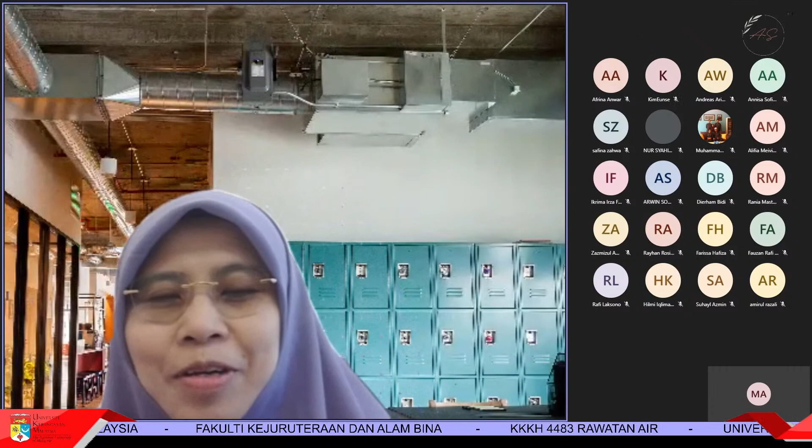Yes. Okay, because you thought that this week is a public holiday, eh? So actually, Malaysia has the highest number of public holidays in the world. That's why I'll give you our Malaysian calendar, because some public holidays are just for a few states, and sometimes it's for the whole country. Okay, I think we can start now.

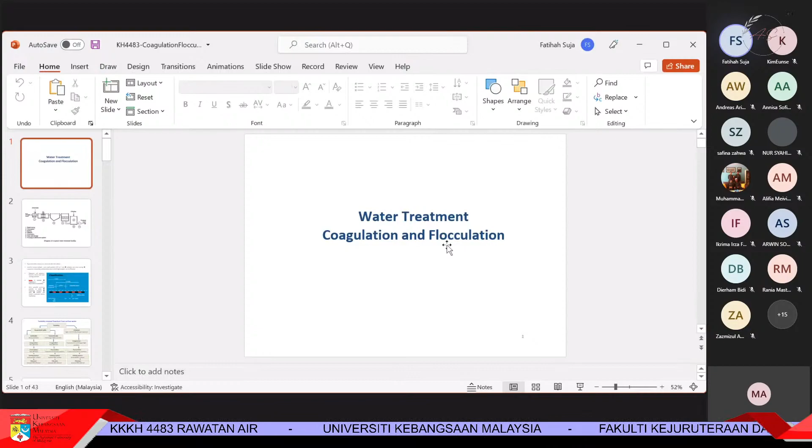Okay, so this week is about water treatment, coagulation and flocculation. As I mentioned before, I don't actually follow the treatment train, because some of the units you may get earlier or some later. So I don't want to fix it for you. So I started the lecture with the filtration unit, and this week is followed by coagulation and flocculation.

Okay, so this is the diagram of a typical treatment facility where you have your raw water coming in, and you can have your coagulation and also the flocculation unit. Sometimes they are combined, sometimes they are separate, sometimes the flocculation is together with the sedimentation process. So here 3 is settling, 4 is filtration, then chlorination, the disinfection, clear well storage, and pumping to the distribution system. This is just a typical treatment facility, but of course depending on your water quality characteristics, you can arrange the unit operations the water needs.

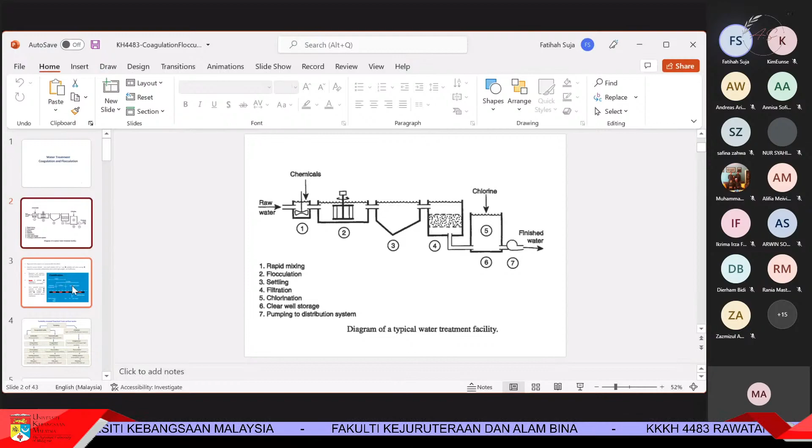Okay, so today is on coagulation and flocculation. Coagulation and flocculation are two consecutive processes, usually with coagulation first, followed by flocculation. These processes are used to remove colloidal particles from water. Colloids are very small particles, and these colloids can cause turbidity and color.

And they are very small, can be 0.1 micron. 1 micron is 1 times 10 to the minus 6 meter. So this is 1 micron until 10 to the minus 9 meter. This is the colloid range, the classification based on size. So these are the colloids that we want to treat. They are very small particles.

They cannot be removed by sedimentation because sedimentation is by gravity, but colloids are very lightweight. So they cannot be removed by sedimentation, and also they cannot be removed by filtration, because they are very small.

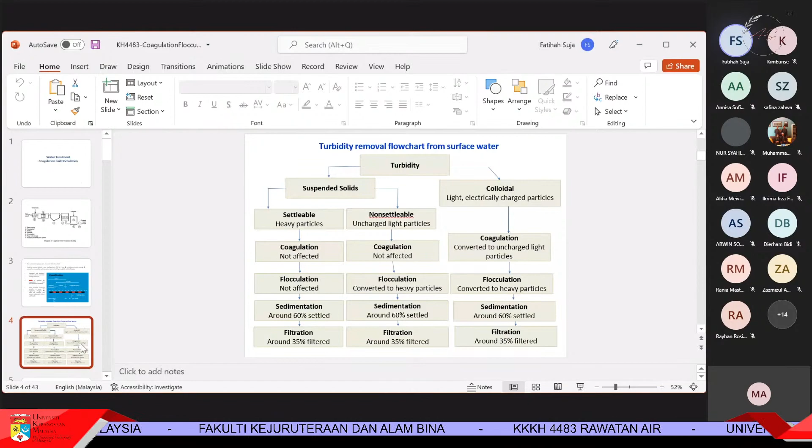So as I mentioned just now, the colloids are negatively charged. So this is the colloid, the negatively charged particle. It is surrounded by a fixed layer of positive ions here. Positive ions surround and are attracted to the negatively charged colloid by electrostatic attraction. So this positively charged ion is attracted to the negatively charged ions due to electrostatic attraction. And we call this the Stern layer, or fixed layer.

This is the Stern layer, which is fixed, because this electrostatic attraction is very strong here. Then this layer is surrounded by a movable diffuse layer of counter ions, the positive ions, but with lower concentration than in the fixed layer here.

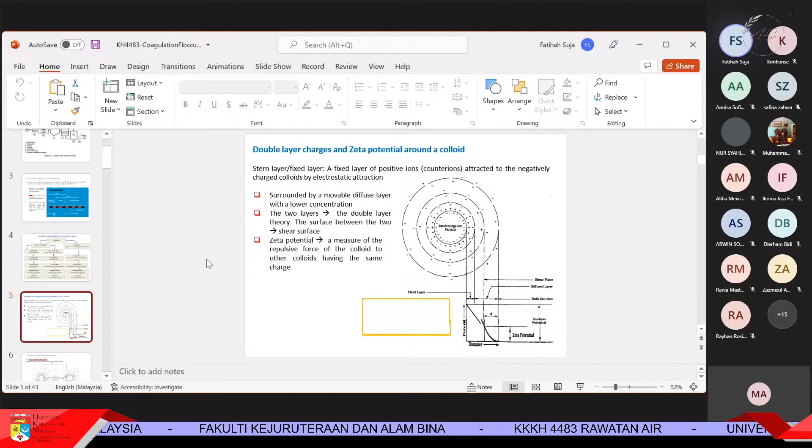So this is a colloid. We have other colloids. So the measure of the repulsive force of the colloid to other colloids having the same charge, we call zeta potential. The measurement of the force, we call this zeta potential. So we have these two.

The electrostatic repulsion: for a stable colloid, the net energy is repulsive. So these negative colloids repel other negatively charged colloids with respect to the distance here. So the electrostatic repulsion force is proportional to 1 over d squared.

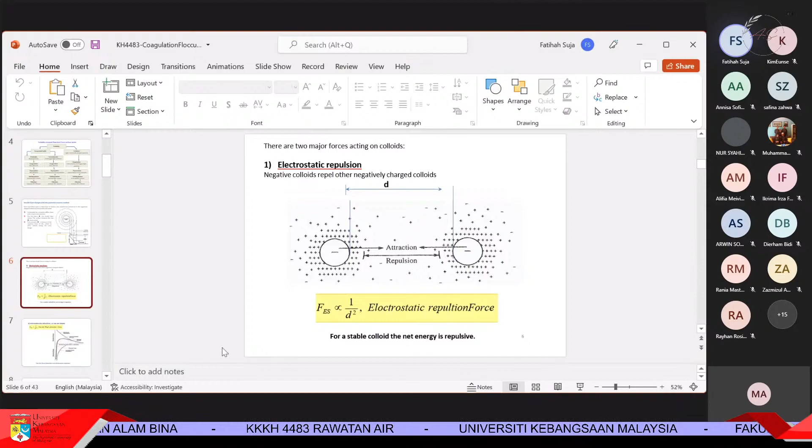And then we have another force, intermolecular attraction, or the van der Waals force. The van der Waals force is 1 over d to the 6. D is the distance between the two negatively charged colloids. So we have a lower force, which is called the van der Waals force, between the two colloids.

Colloidal destabilization and agglomeration. As illustrated in the previous slides, colloids are stable because of the net repulsive force between them, and consequently they will stay stable in suspension unless this net repulsive force is neutralized. So the process of neutralization of the repulsive force is called destabilization, and destabilization is achieved by a process called coagulation.

So coagulation is the process of destabilization of colloids by adding chemicals or coagulants with a counter charge. The coagulants are positively charged, to neutralize the charge carried by the colloids. This reduces the repelling force and gives the opportunity for the attractive forces to prevail, making the particles ready to agglomerate in the flocculation process and form bigger particles.

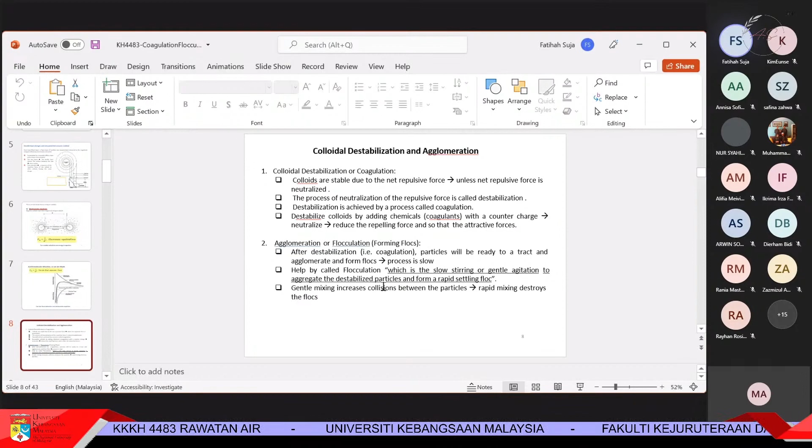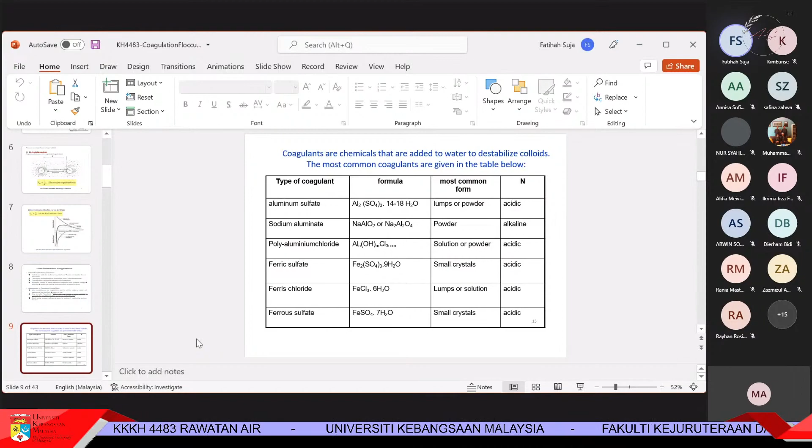The most common coagulant that we use is alum. This is the commercial grade alum that we can buy, with a molecular weight of 594. Density is from 600 to 1,100 kilogram per cubic meter. This is the commercial grade, this is the reagent grade. The color can be tan to grey-green. You can get aluminium sulfate in dry or liquid form, and dry form is most common.

Alum is dissolved in water. No, this is alum actually. Alum is dissolved in water at a concentration of 3 to 7%, 5% most common, then fed to the raw water by chemical feeders, the dosage pumps. So in the coagulation unit, we need to provide the dosage pump.

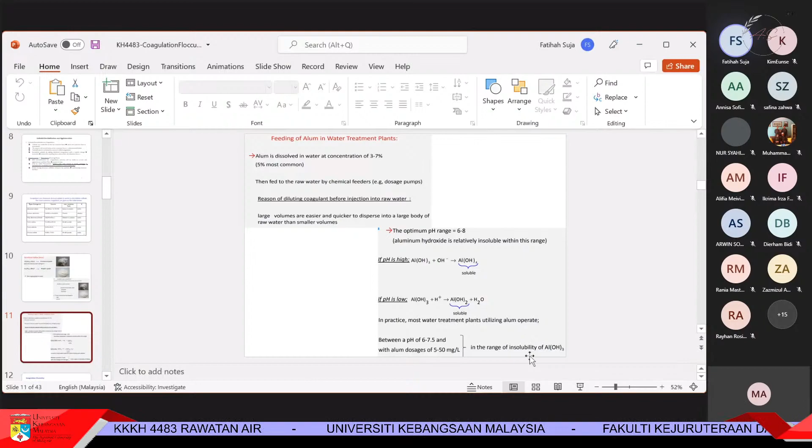That's why if you go and visit a treatment plant, at the influent to the water treatment plant there will be a pipe going into the lab, because they need to do the jar test experiment to determine the exact amount of alum that is needed for that batch of water. Okay.

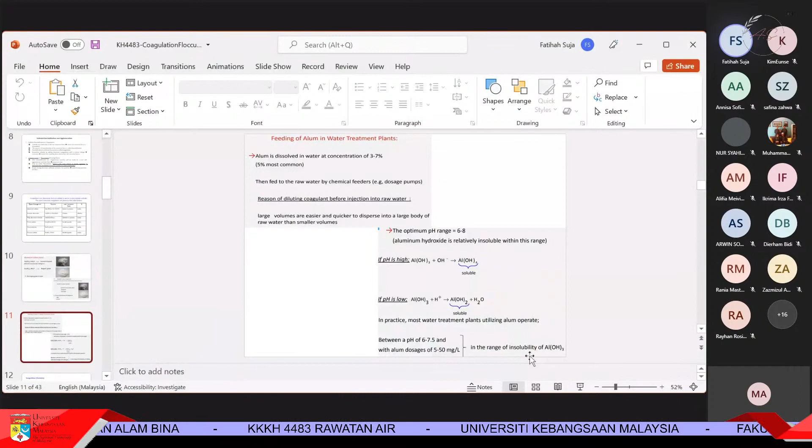Okay. So the coagulation chemistry: aluminum sulfate and water, you will get aluminum ion and sulfate, and then water again. So the aluminum ion will react with the colloids so that the surface charge is neutralized. So this is the optimum pH. Since the coagulation reaction results in a decrease of the pH, it is common practice to add lime. So usually they have aluminum sulfate and lime together with the coagulant to increase the pH, consequently countering the effect of the pH decrease.

Of course, you know that pH decrease is something that you don't want, because some chemical reactions occur at very low pH. So we don't want any chemical reactions to occur in your drinking water that has been treated using the coagulation flocculation process. Okay.

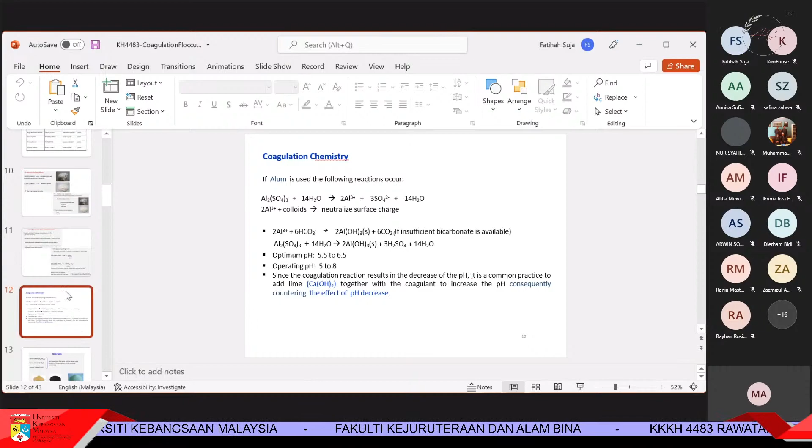Okay. The second most common coagulant used is iron salts. So this is ferric sulfate, it can be ferric chloride, it can be ferrous sulfate. They are less expensive than alum but can cause color problems if the precipitate is not removed completely. So there are pros and cons in using these iron salts. Okay.

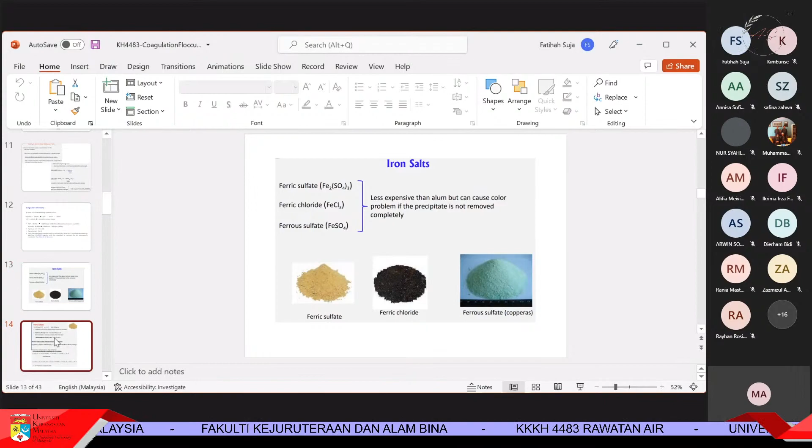Okay, ferric sulfate: the molecular weight is 399.9 grams per mole, available in dry form as granules, most common, or as powder. The optimum pH is 3.5 to 7 and above 9. Ferric hydroxide is relatively insoluble within this range. The typical dosage is 10 to 250 milligrams per liter. So this is the reaction between the sulfate and natural bicarbonate alkalinity. If the natural alkalinity is insufficient for the reaction, then you have to add lime.

Just now I've mentioned that pH is very important, and ferric sulfate or alum are taking up alkalinity. So you have to make sure that if alkalinity is not enough and the pH becomes very low, then you have to add lime in the coagulation process.

Okay. You can see that using aluminum sulfate, finally you will get sludge with aluminum hydroxide. So aluminum compounds can actually have a bad impact on your health. It can cause the disease called Alzheimer's.

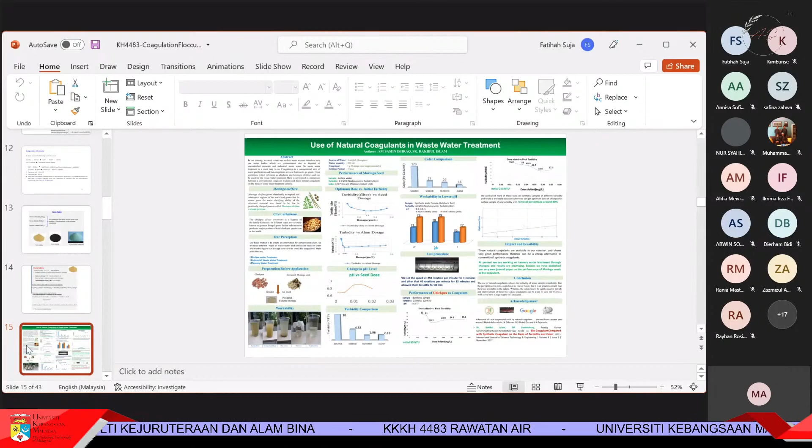Okay, so just now we are talking about the factors that affect.

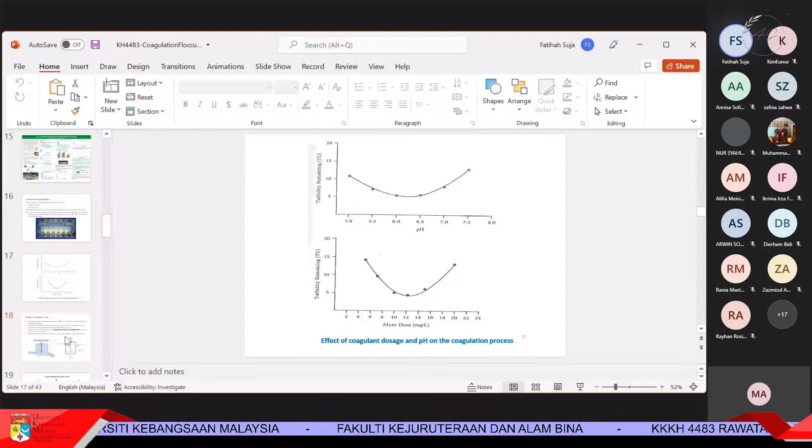Okay. So design of coagulation tank. Coagulation, for the coagulation tank, we illustrated in the previous slide. Coagulation requires the addition of a chemical called coagulant, and the coagulant should be very well mixed with water to produce a homogeneous mixture of the influent water and the coagulant to achieve the best coagulation efficiency. So it must be very well mixed.

So this mixing is achieved in a tank we call rapid mixer. Sometimes it is a square tank and sometimes it is a circular cross section, because this is to achieve the best mixing efficiency, whether you use a square tank or a circular cross section tank. So the most common mixers used in the coagulation tank are mechanical mixers. We can have turbine, propeller, and paddle mixers.

So because we need the reaction to be very rapid, the detention time for flash mixers or rapid mixers is measured in seconds, whereas for the flocculation basin it is generally between 5 and 30 minutes. Okay, so coagulation takes only a few seconds, but in flocculation the mixing is very slow, so you can have from 5 to 30 minutes of detention time.

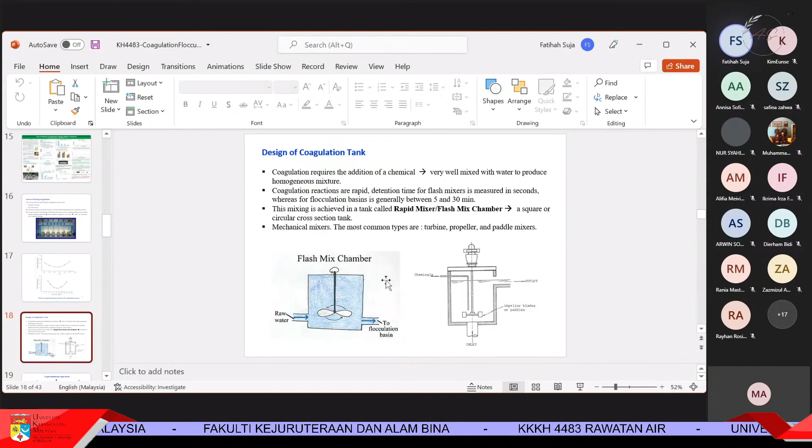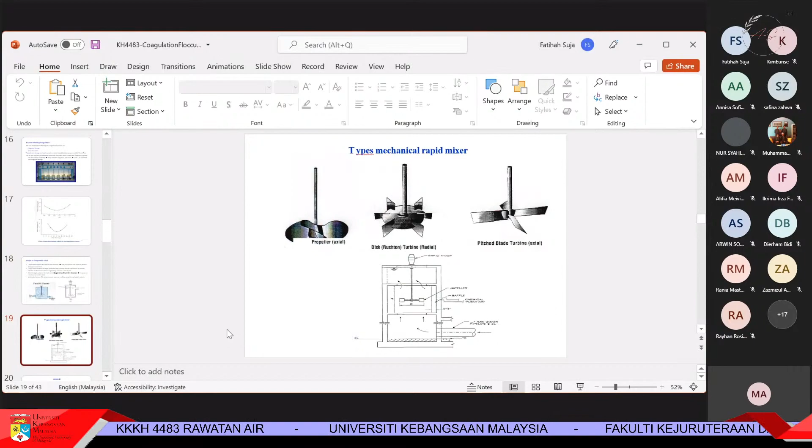Okay, this is the photo on the types of mechanical rapid mixer. It can be propeller, turbine, or pitched blade turbine. Okay. Okay, for the mixing,

to ensure maximum contact between the reagent and the suspended particles, coagulants, or sometimes coagulant aids, must be rapidly dispersed or mixed throughout the water. Because otherwise the coagulant will react with water and dissipate some of its coagulating power. So that's why you have to make sure that it is rapidly dispersed, meaning otherwise you will need more coagulant, so it will not be economical.

So okay. For you to ensure complete mixing and optimum plug flow reactor operation, proper detention time in the basin is required. So you can calculate detention time based on this formula. For complete mixing, this is the detention time. Of course, t equals V over Q, but this also includes the influent and effluent. So let's say you have the influent concentration, you will be able to determine the detention time if your target is a certain concentration of turbidity. For the plug flow system, this is the formula.

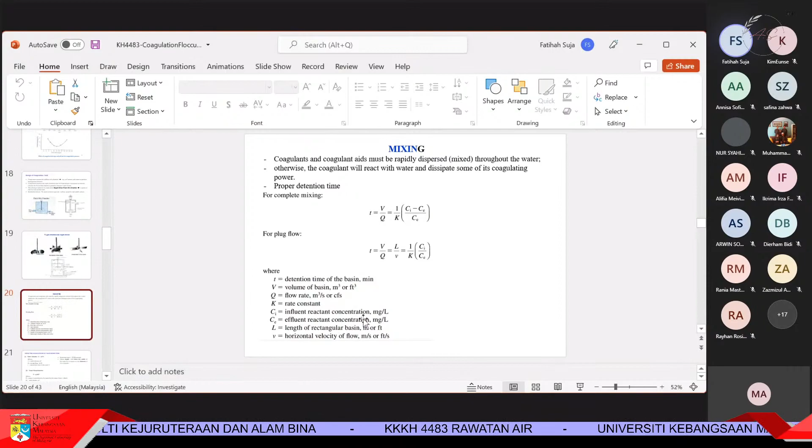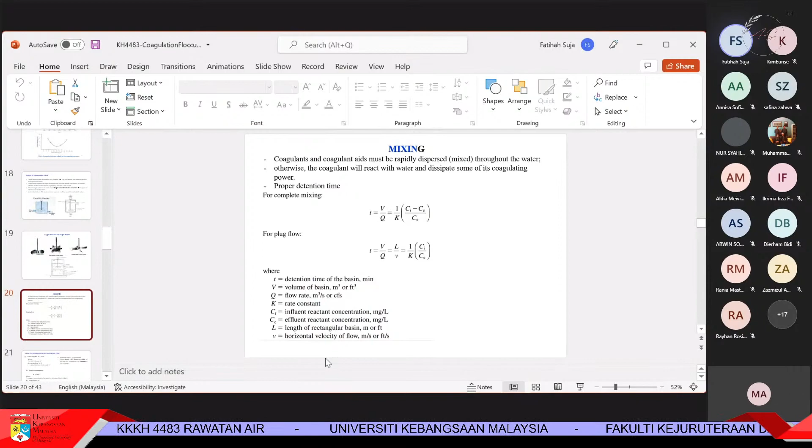t, the detention time of the basin, V, the volume of basin, Q, the flow rate, K, the rate constant, influent reactant concentration, effluent reactant concentration, L is the length of rectangular basin, and v is the horizontal velocity of flow in meter per second or feet per second.

Okay. How do you size the coagulation or rapid mixer tank? As just mentioned, the detention time in the rapid mixer is in the range of 20 to 60 seconds. This short time is enough to achieve complete mixing of the coagulant and to complete the coagulation process. The water depth is usually taken as 1.5 times the width of the tank if it is square, or 1.5 times the diameter if it is a circular tank. Meaning that for a circular tank, the water depth is 1.5 times the diameter.

Okay, so this is the formula for tank volume: V equal to Q, the design flow, multiplied by the detention time in the tank. Another important parameter for the design of the rapid mixer tank is the power requirement, how much power you need to provide for the rapid mixing. P equal to mu V G squared. P is the power transmitted to the water by the mixer, in newton meter per second, which is watt; V, the tank volume; G, the velocity gradient per second; and mu, the dynamic viscosity of water, in newton second per square meter. So this is the power requirement.

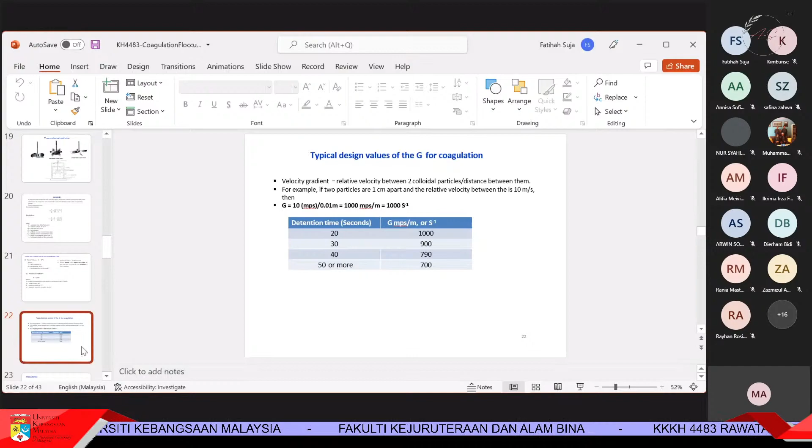Okay, then the flocculation. After coagulation, it goes through the flocculation process. Flocculation follows coagulation in the conventional water treatment process. But if you can justify why, after coagulation, you put something else and then after that you put the flocculation, you can also do that. Flocculation is a physical process of slowly mixing the coagulated water to increase the probability of particle collisions.

I will not stop at 1 o'clock because I think I can finish the class before 2 hours for this coagulation flocculation process, because it's quite simple. Okay, so please bear with me. Okay.

It is a physical process, slowly mixing the coagulated water to increase the probability of particle collision. Through experience, we see that effective mixing reduces the required amount of chemicals and greatly improves the sedimentation process. And if we can improve the sedimentation process, we can also have longer filter runs and higher quality finished water. So a simple physical process like this is very important, because we improve the efficiency of our system without adding much capital cost.

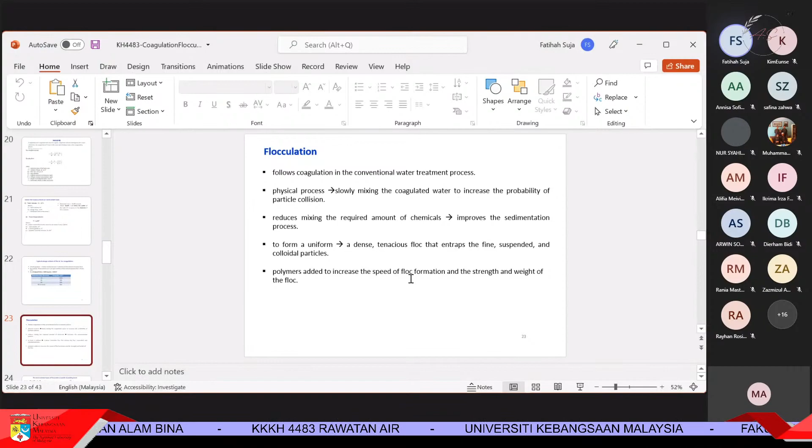So the goal of this flocculation process is to form a uniform, feather-like material, a very dense, tenacious floc that entraps the fine, suspended, and colloidal particles. You can also add polymers. These polymers are often added during flocculation to increase the speed of floc formation and the strength and weight of the floc. If you increase the weight, it will result in better sedimentation of the floc.

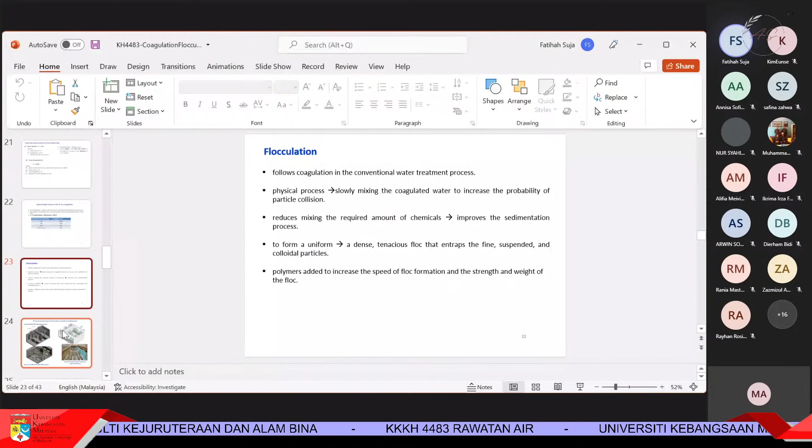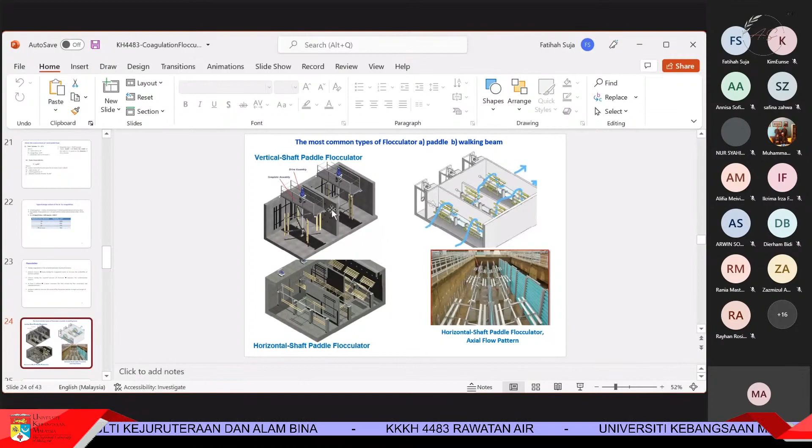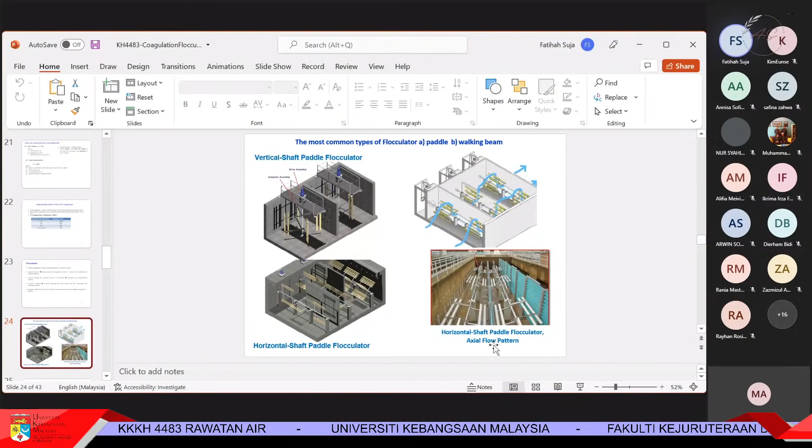Then the configuration of the flocculation tank. The most common types of flocculator are the paddle flocculator and the walking beam. This is the paddle. It can be a vertical shaft paddle flocculator, or a horizontal shaft paddle flocculator, slowly moving. The paddle will slowly move, this one vertically and this one horizontally. You can also have the horizontal shaft paddle flocculator with an axial flow pattern. Not the walking beam yet.

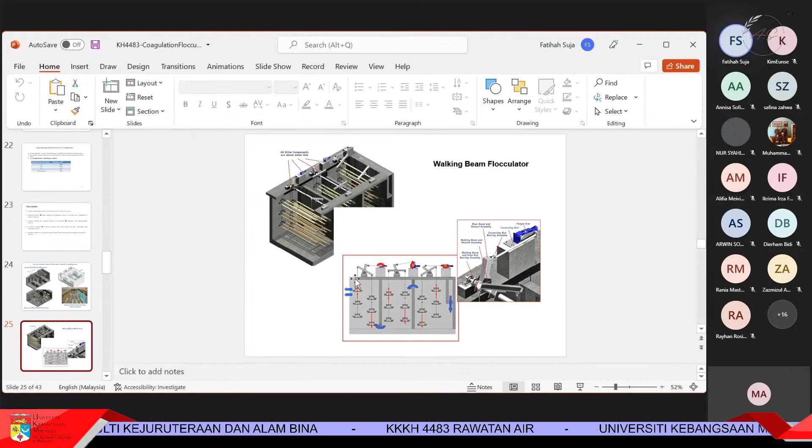This is the walking beam flocculator. If you go to any water treatment plant, you can see this flocculator walking from here to here, and that's why we call it a walking beam flocculator. Okay, and we also have another type, this one.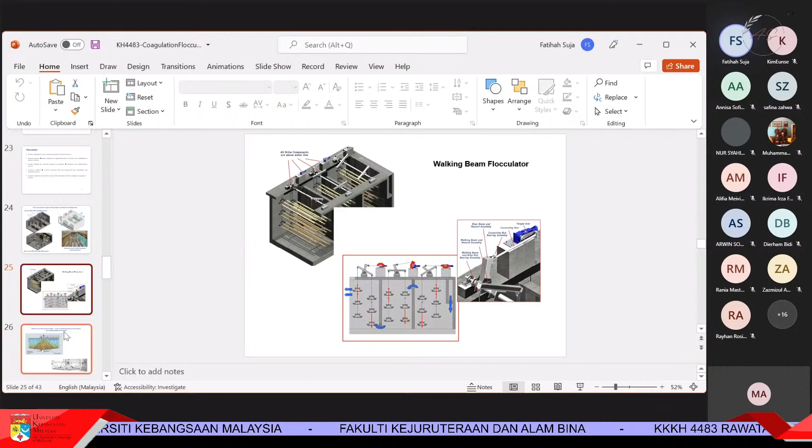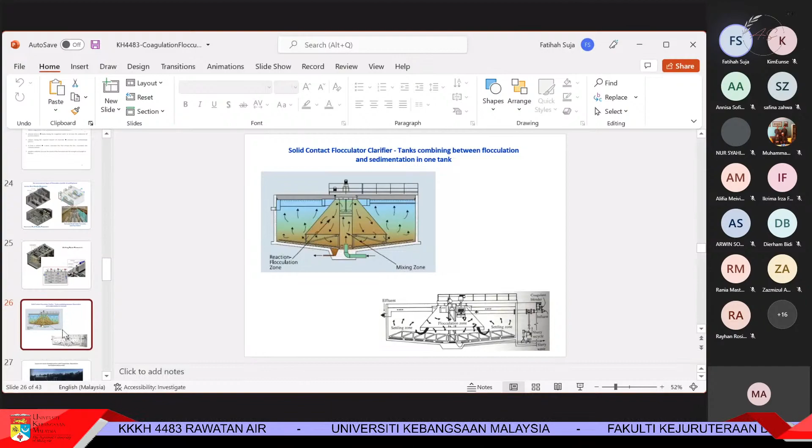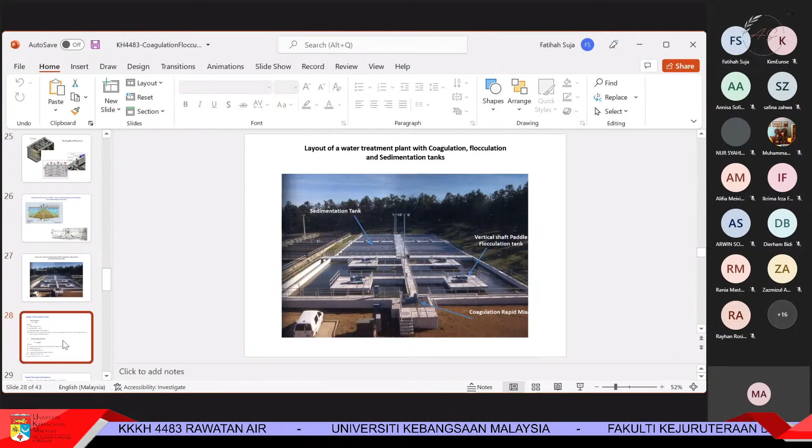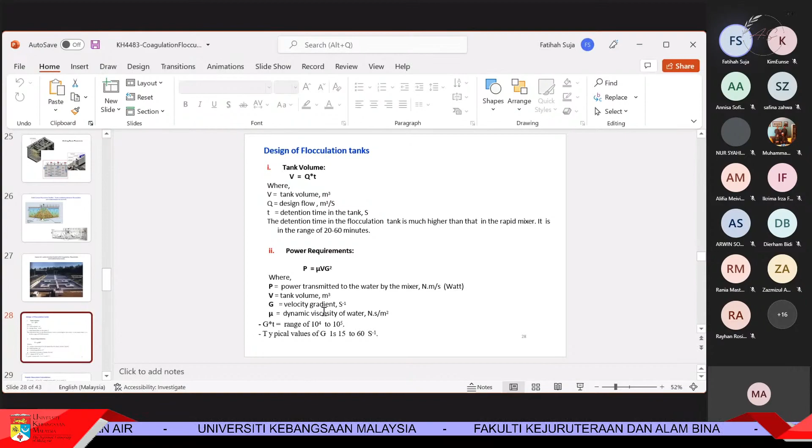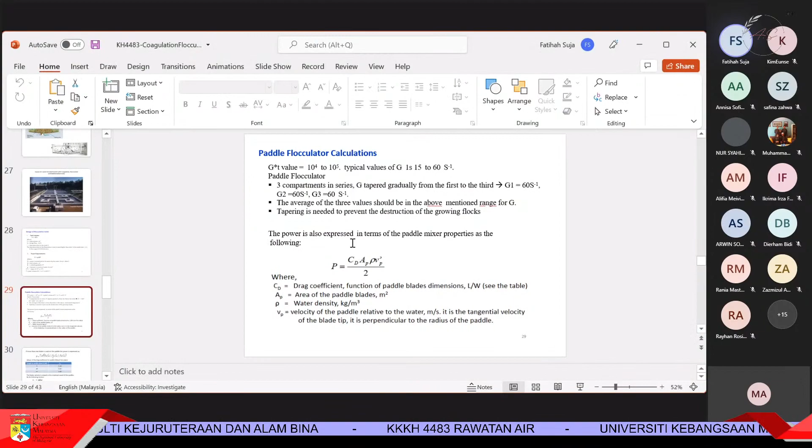Paddle flocculators usually have individual compartments for each set of paddles. The useful power input imparted by a paddle to the water depends on the drag force and the relative velocity with respect to the paddle. The value of G times T, the velocity gradient times the detention time, is an important parameter in the flocculator, because it has a range of 10 to the power of 4 to 10 to the power of 5. And the typical value of G is 15 to 60 per second. So this is the common value.

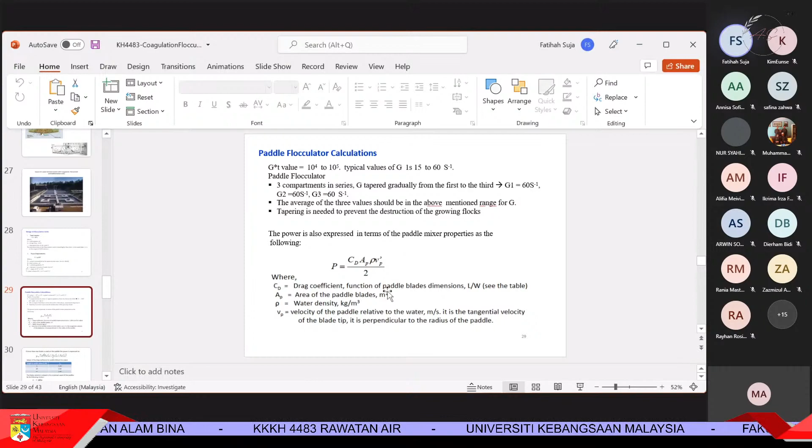So when you design a water treatment plant and you want to use a paddle flocculator, you need to show the calculation, what is the G that you use and what is the power requirement of your system. The power is also expressed in terms of the paddle mixer properties as follows. This is the power, this is the drag coefficient, a function of paddle blade dimensions. You can get all the values from a handbook, or if you Google: the drag coefficient, the area of the paddle blades, the water density, and the velocity of the paddle relative to the water.

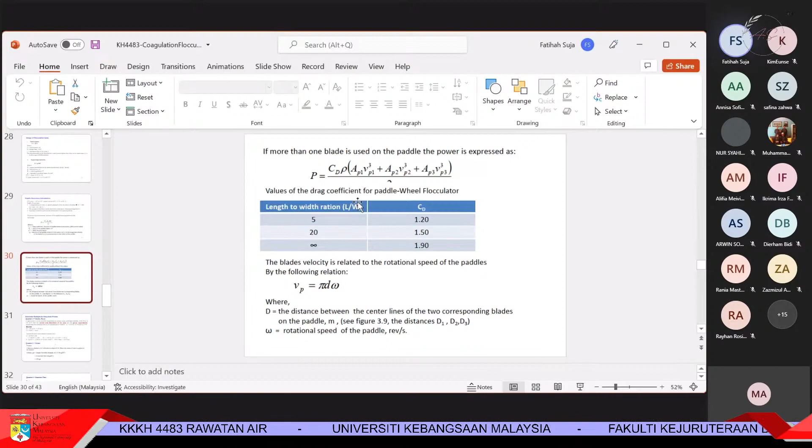If you want to calculate in detail the power for your paddle mixer, and if more than one blade is used on the paddle, the power is expressed as P equal to this formula, and you divide by 2. Okay, and values of the drag coefficient for a paddle wheel flocculator: length to width ratio L over W. If 5, the CD is 1.2. If 20, 1.5. This is the ultimate value; you can have 1.9.

The blade velocity is related to the rotational speed of the paddles by the following relation: the velocity is pi d omega. This is if you want to calculate in detail the paddle that you use for your flocculation basin. Actually I give you all the theories, but at the end I show you the calculation examples, because if we just give you theory without showing the calculation for the design of the two units, coagulation and flocculation, maybe it's a bit confusing. So I show you first calculation examples of the coagulation process.

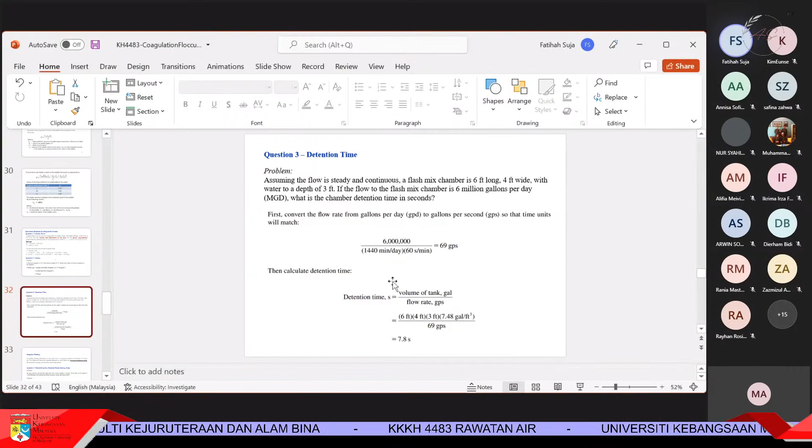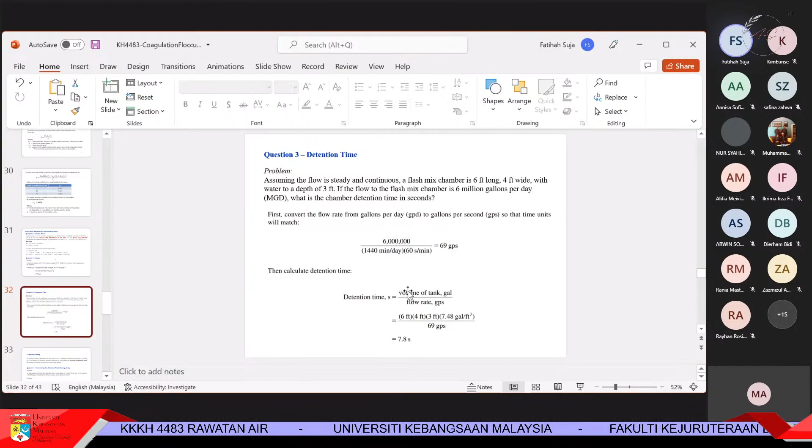So of course, unit conversion is very important. Sometimes the calculation is easy, but you make mistake in the conversion. That's why in the filtration exercise that I give you for last week lesson, I just want you to copy and make sure that you input all the unit during the calculation, so that I know that you are very expert in converting units, because this is very important in calculation.

Okay, coagulant feeding. In adding or dosing chemicals to the water flow, a measured amount of chemical is called for, meaning that a measured amount of it is very, very important for the dosing, because not only that you want to save the chemicals, but when the chemicals become at certain quantity and pH, you don't want the chemicals to be soluble. So that's why the precipitate must be formed when you use these coagulants. So the amount of chemical required depends on such factors such as the type of chemical used, the reason for dosing, and the flow rate being treated.

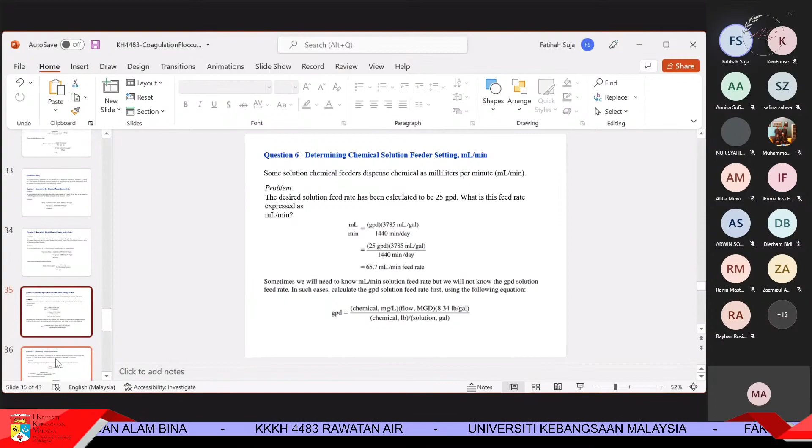Determining percent of solution. The strength of solution is a measure of the amount of chemical solute dissolved in the solution. We use the following equation to determine percent strength of solution. So let's say you prefer to feed your coagulation tank using solution because I think it's easier and it is more accurate. It is easier for you to use the flash mixer if you have solution. So calculation on the percent strength of solution is very important because you want to have an accurate calculation. So percent strength is the weight of chemical divided by the weight of water and the chemical.

Okay, so this is what you mean by percent strength of solution. So now calculate percent strength. What is the percent strength that you have if you have, let's say, 0.625 pound chemical? So you have the water, 15 gallon. You have to multiply by the unit here, and then you have to add the amount of chemical that you have. Then from here you get the percent strength of your

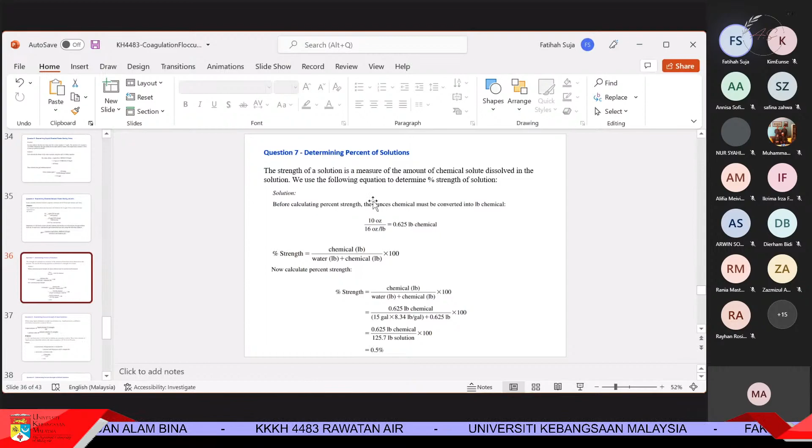coagulant. And determining percent strength of liquid solution. This is also calculation on determining the percent strength. Let's say if you have liquid polymer, so the liquid polymer percent strength divide by 100 because you only have the polymer. Okay, so for example, a problem: a 12% liquid polymer is to be used in making up a polymer solution. How many pounds of liquid polymer should be mixed with water to produce 120 pounds of a 0.5% polymer?

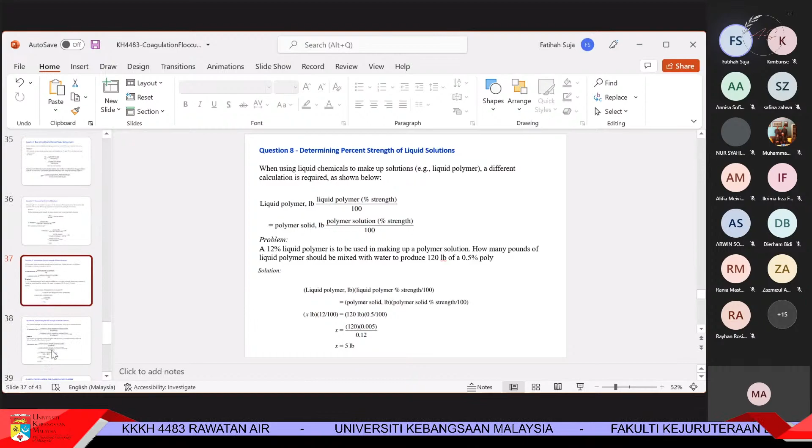Okay, so this is what you want, this is what you have. Finally, you want to find the X, meaning the amount of polymer that you need to put in a 120 pound of water. So this is the example of calculation. And if you have mixed solution, let's say you use coagulant and you have also alum and also you have the lime, you can also calculate the strength based on the strength of mix, the first solution and the second solution here. So when you come across this and you want to calculate, you can just follow each step easily, and it is provided here so that you can understand.

Okay, calculation examples for flocculation process. So for the coagulation process, the important parameter is the size of the tank, the power needed, and the detention time, and also the feeder setting, and also the amount of chemicals that you want to use for your flash mixer tank. Okay, for the calculation examples for flocculation process, this is question 1. This is when you combine the coagulation and flocculation process. First is the detention time. Alum dosage is 40 milligram per liter. K, which is the rate constant, is 90 per day based on lab test. So compute the detention time for complete mixing and plug flow reactor for 90% reduction.

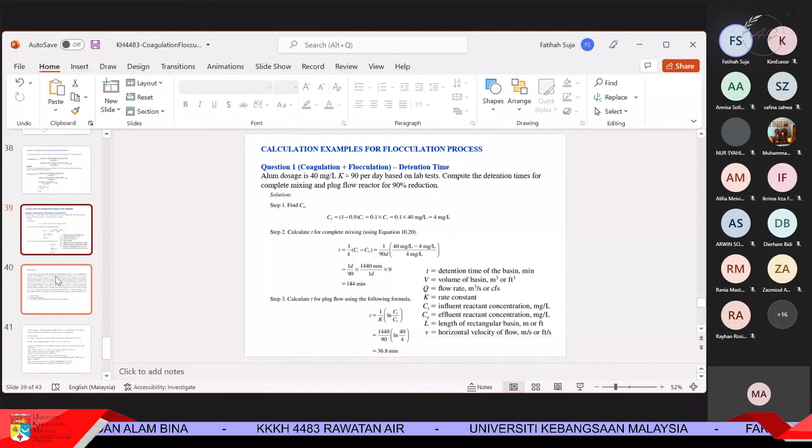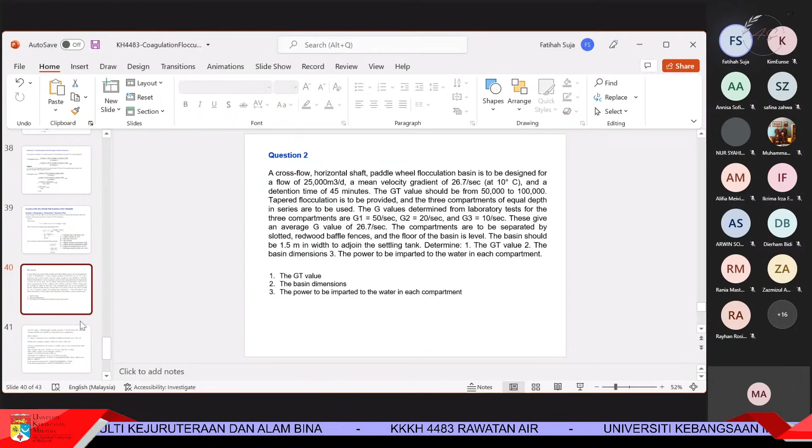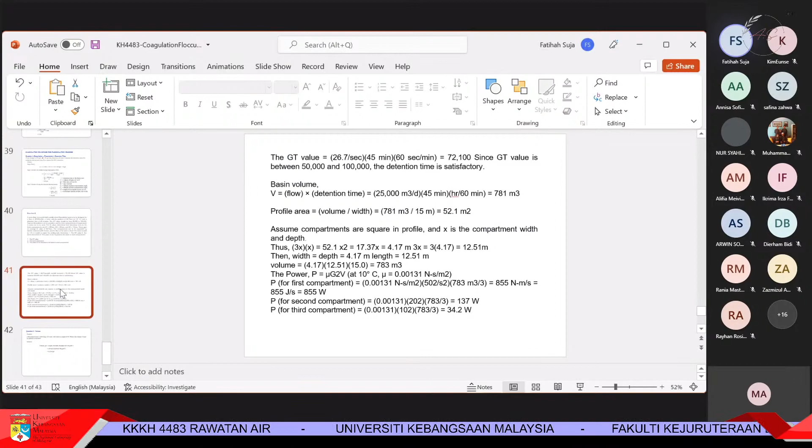So for the flocculation process, the important design parameters that you need to know and you need to put in your design of your water treatment plant: first is the detention time, then the basin dimensions and the power imparted to the water in each compartment. So the GT value will also be together with the power to be imparted to the water in each compartment, if you use 3 different compartments like what we have here, cross flow, horizontal shaft. Okay, so you have to carefully think and determine based on the requirement of what you need in your effluent removal.

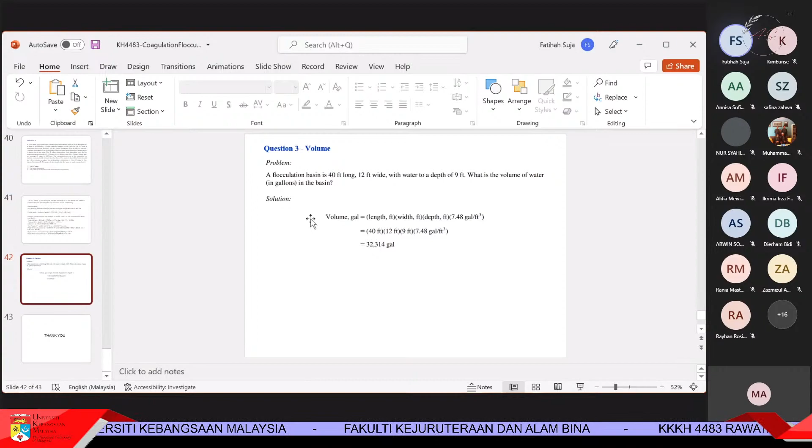Okay, so this is another example of determining the volume of the flocculation basin. Okay, so I finished everything on the coagulation flocculation. It is very simple, so I hope that you can understand. You can ask questions. Do you have any questions, students? Do you have any questions now?

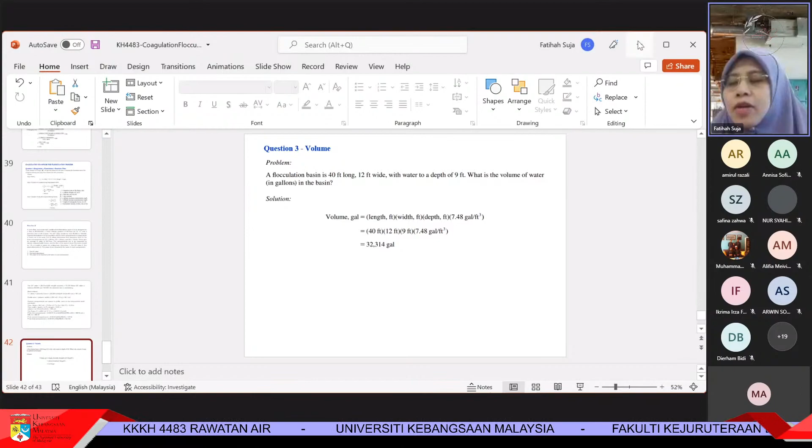Quantity. Oh, sorry, quantity. Water quantity meaning that you have decided on the location of your water treatment plant. So this one is something that you assume, because after you get the location, you see that maybe the water treatment plant is to supply water to which community. Okay, so you can show me in the map where is the community that you want to serve, and you can decide if it is not stated in the reference journals or whatever.

You can always assume how many population that you want to supply using your water treatment plant. Okay, because by having this quantity, then only you can design your treatment plant. Okay, and also all the units, they need quantity and quality of your source water. So it's like your own creation of the community that you want to supply the treated water. Okay, so it's easier.

Because in my first slide, I think I've already taught you how to calculate the quantity of the water supply needed, right? And also those of you who have taken water supply in KH3113, you also can estimate the amount of water needed for that community. Let's say if you want to build your water treatment plant for that community, then you can tell me the value that you get is based on what estimation of the community that need to be served by your water treatment plant. Okay, is it okay?

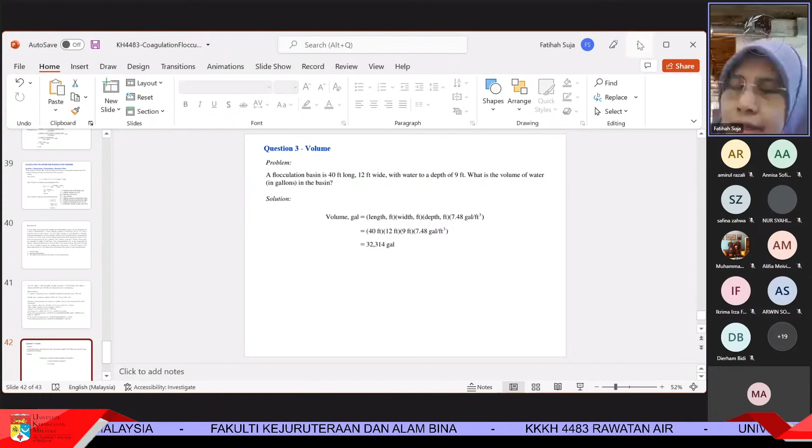And then on Tuesday you will have a quiz or homework if I have finished the part that I need to describe in class. Tomorrow is a public holiday, but I want to give you a quiz on this coagulation flocculation process. So what time do you want me to give you the quiz? It's simple. By just reading through the slides on this coagulation flocculation process, you will be able to answer the quiz very well. And the marks for this quiz will be counted in your final marks. Okay, when do you want the quiz? Tomorrow or next week?

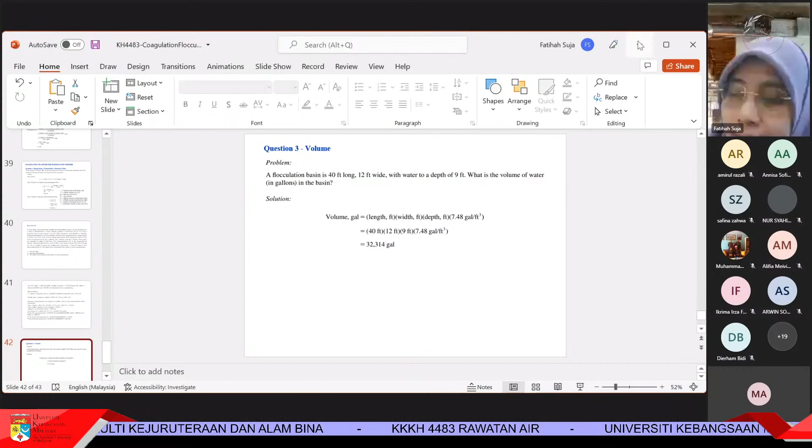Next week when you have this presentation, maybe any time not during the presentation time, because I have to set the time. Can I give you the quiz tomorrow? Huh? Is it okay if I give you the quiz tomorrow at 9? Or you want a later time? Not only 1 hour, I think half an hour you can finish. When is the suitable time for you? I try to accommodate your convenience for having this quiz. When? Somebody just tell me, and then the rest need to follow because they are quiet. Okay, what time do you want?

Only on the materials for this slide, coagulation, flocculation process. Because I'm afraid that I will not be able to ask all questions in your final exam. So I just want to make sure that I ask questions for all the parts that you have in your course. Because I don't give you a mid-sem exam, so this quiz is also important. When is the quiz time that you want? Is it tomorrow, 9 o'clock? Tomorrow. Okay, tomorrow, 9 o'clock.

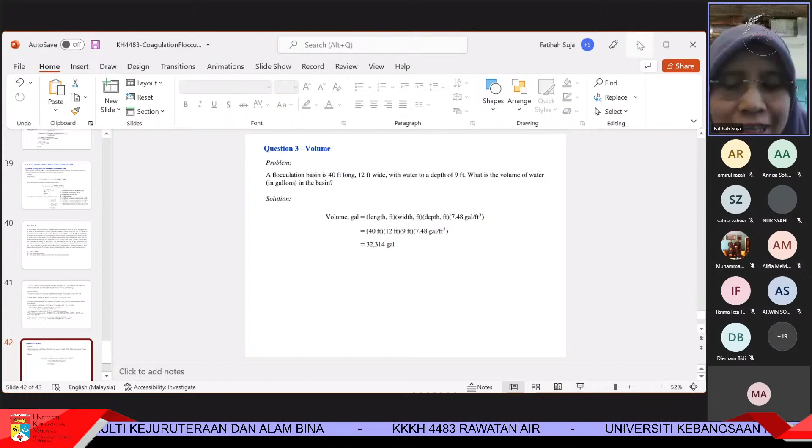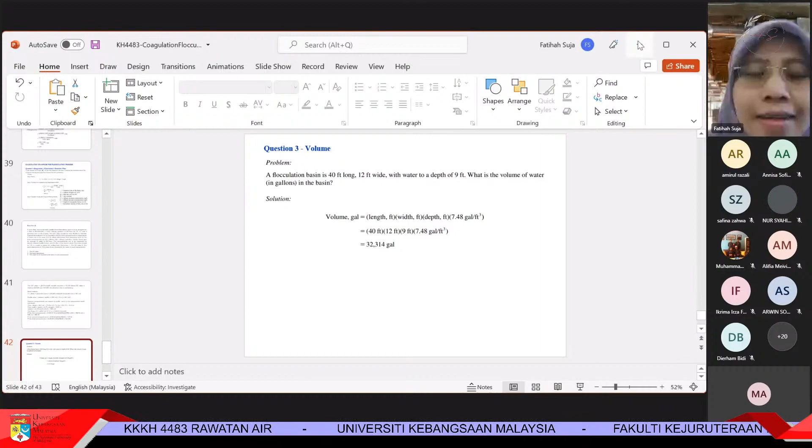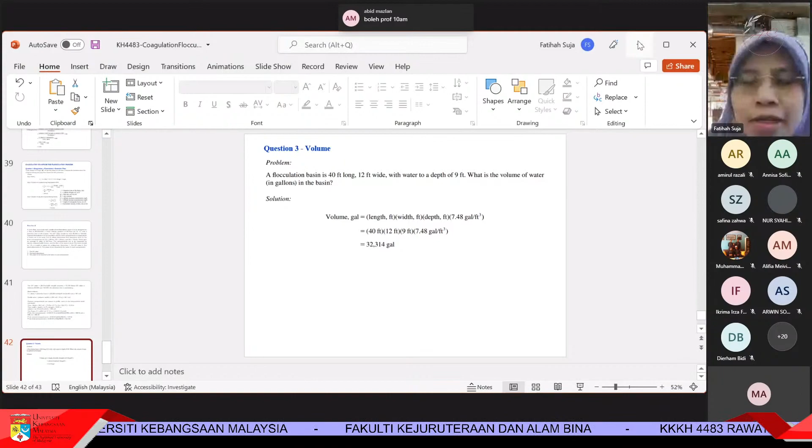10 boleh, Prof. Okay, 10. So the rest need to follow because you are all quiet. So just now who's telling me 10? Dierham? Amirul. Amirul. So you need to follow the time chosen by Amirul. Okay, so tomorrow at 10, you will have a quiz on this coagulation flocculation process. Just read through one time and also the examples on the calculation.

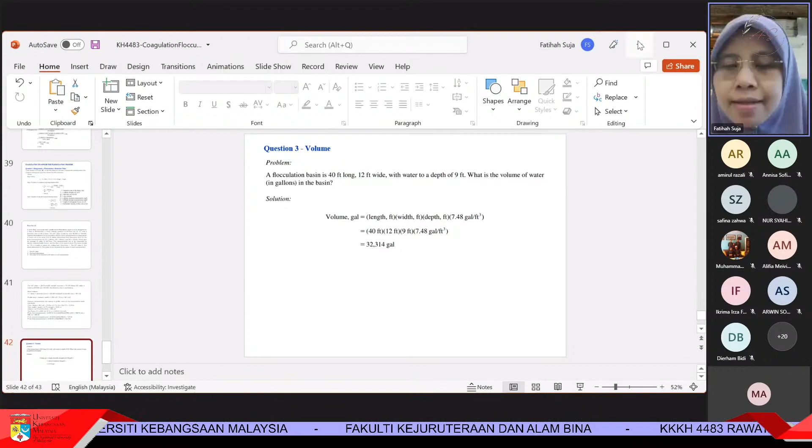Okay. See you again next week. So tomorrow at 10, I will set the quiz in the UKM folio. Okay, see you all. You can always ask me about your small presentation. You can always ask me in the groups.